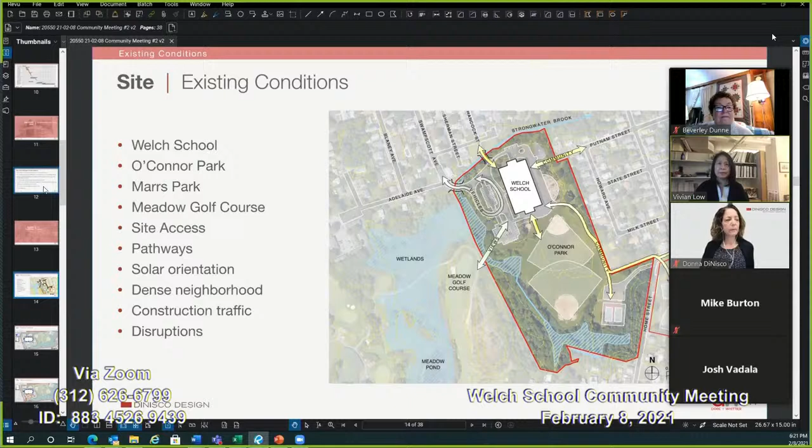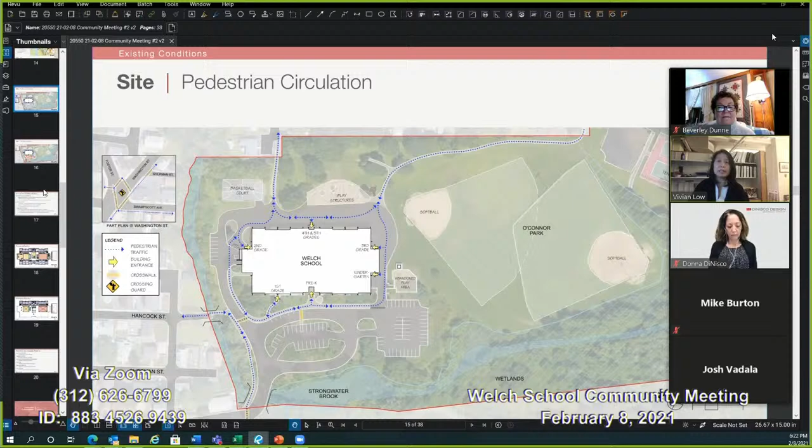Understanding how circulation works helps to inform how improvements to the building and the site are approached.

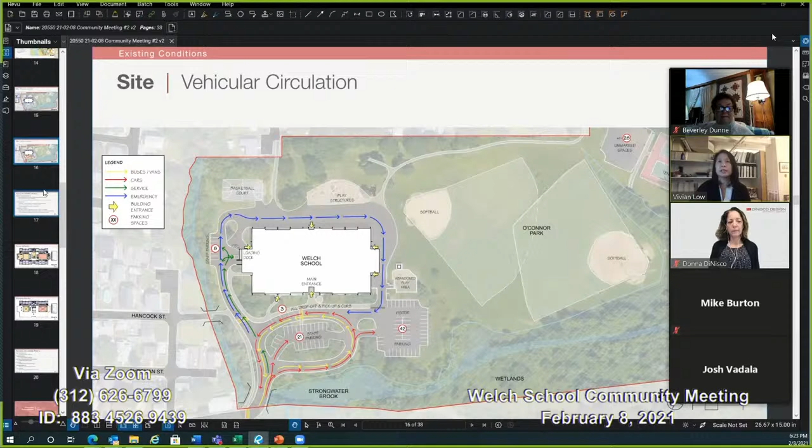So what we learn from the site is that based on the existing conditions, improvements are required for accessibility as well as for maintenance purposes. We looked at the condition of the vehicular pavement and curbing. Some are in poor condition, some are in fair condition. We're going to be looking at how to improve that.

We looked at the recreation areas. The play area in the back has tree wells that have in time kind of depressed. So we're going to look at improving that area to make it safe for kids to run around in. We also looked at the play structures as well as site lighting, and then we also looked at what the condition of existing plant material is.

The site is bordered by wetlands and riverfront, and we want to make sure that whatever we do on the site does not impact the wetlands and the waterfront or the riverfront.

What we'll be proposing is to improve a lot of these existing conditions and also to improve the site lighting, with the goal of providing a safe and accessible outdoor environment.

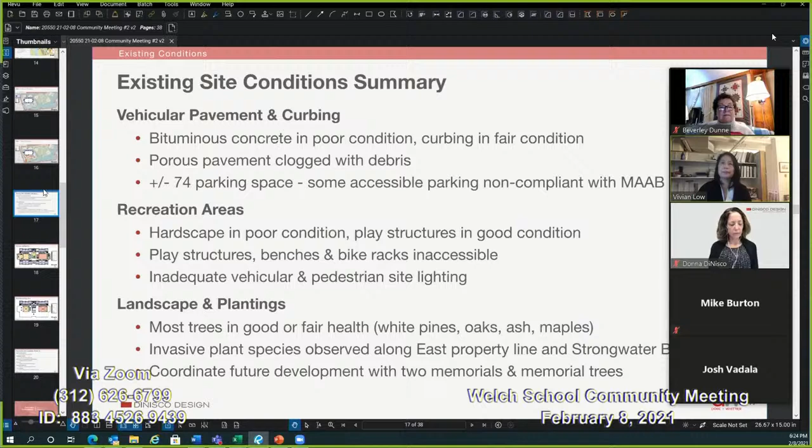The existing building conditions were also evaluated as part of the PDP phase. Again, as Mike referred to, the PDP is the first part of the feasibility study.

We did find, however, that all building systems will need to be replaced, and improvements are required to meet accessibility requirements within the school.

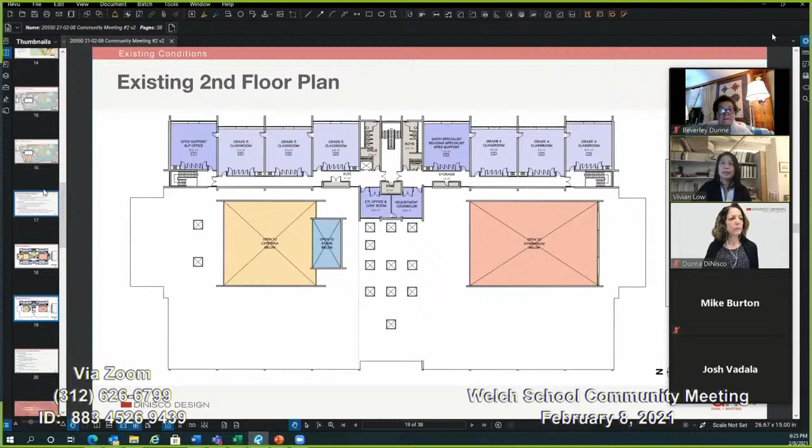The existing structure is sound, but will require reinforcement at areas of work where we will be adding equipment. Hazardous materials have been identified, and areas of code and accessibility non-compliance have been evaluated.

Based on the conclusions from the existing condition studies, we are refining the scope of work that will be included as part of the Welch Elementary School project. Again, all of the existing conditions and also the program, as Donna mentioned, is really what informs this project.

We'll be repairing and providing new pavement at the play area to the back side of the school. The area where the play structure is will have new rubberized surfacing, providing accessibility to that area for kids with disabilities. We'll also be looking to add new site lighting, and looking at ways to enhance safety and security on the site.

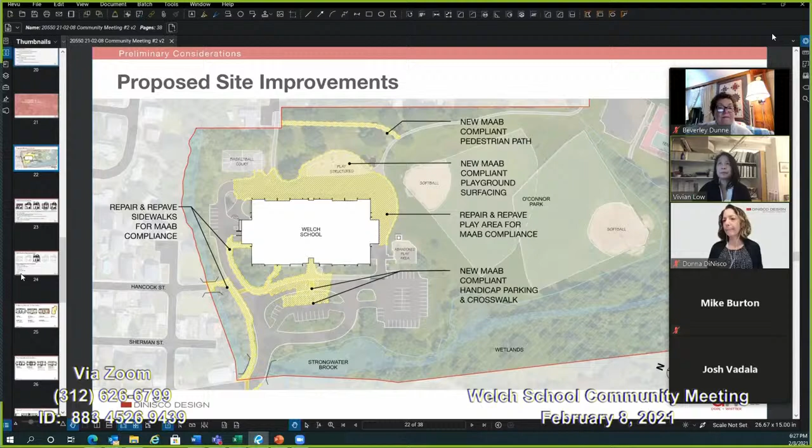While most of the systems upgrades within the building are pretty straightforward, we've looked at several options for the mechanical system that provides heating and possibly cooling at the Welch.

The existing system provides for heating only through what's called a unit ventilator, these are cabinets that sit at each window in each classroom and draw fresh air in through the window wall. It heats and mixes with some of the ambient air, heated through a heating coil from the cabinet, and then blown out again. These units are old.

Many are in need of replacing, or they'll need replacement parts, but parts are starting to become hard to come by. They're also very noisy, which really contributes negatively to the learning environment.

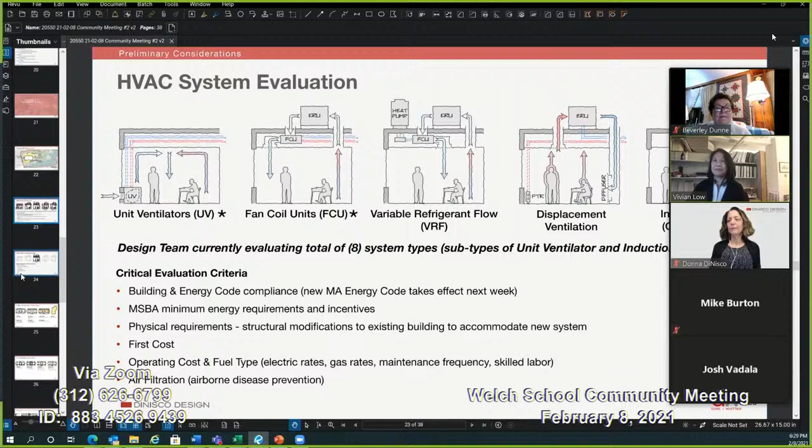So from the evaluations, the VRF system was ultimately selected as the basis of design. VRF stands for Variable Refrigerant Flow, which describes very broadly how the system works. The system provides full air conditioning for the whole building and is electrically operated, so it does not require a gas line to be brought in. It's also cost efficient in that it has a lower installation rate cost than some of the other systems, and also has efficient operating costs.

Also, the components, you'll see in this little diagram, reside in the ceiling, and they're fairly quiet, which is great for a learning environment.

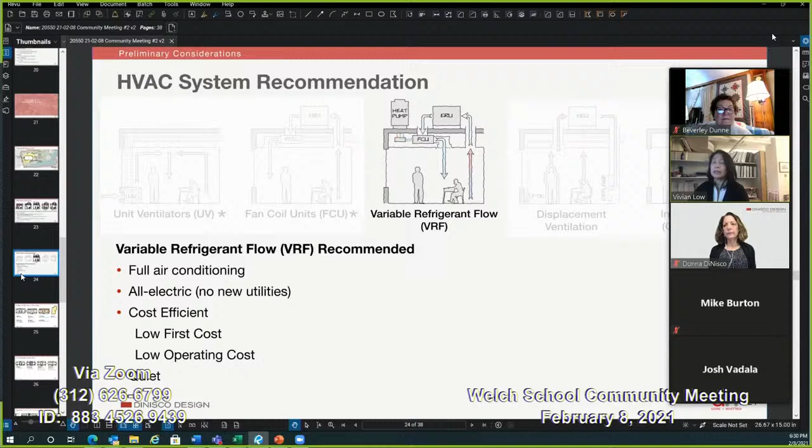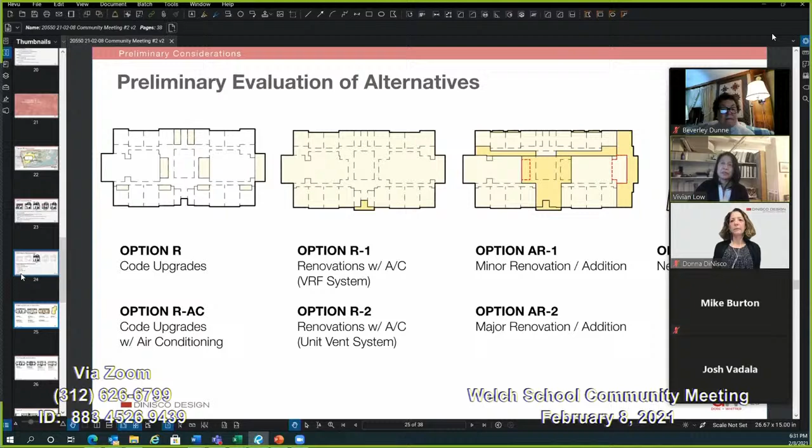Working closely with members of the building committee and school district to narrow down the options, it was determined that neither an addition renovation project or a new building would be fiscally feasible. We want to note that the Welch Elementary School project, when first submitted to the MSBA, was to be a robust repairs project, but was moved to the core program by the MSBA. This allows us to build more into the project, such as renovations for programmatic needs, whereas a repairs only would really just repair and replace building systems.

So based on the initial goals and fiscal limitations, the final evaluation of alternatives would include a repairs and code upgrade option, which is the option R on the screen here, and RAC, and a renovations option, which is the R1 and the R1 Plus. These are just 2 different approaches to the 2 basic options.

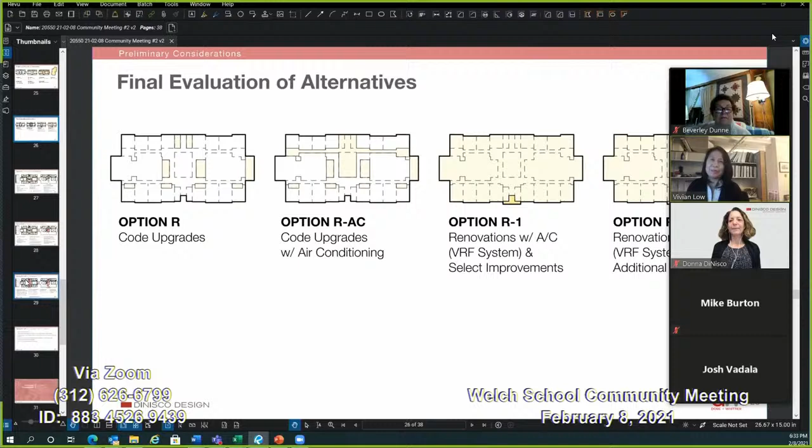Option R is just a basic swap out of the unit vent system for HVAC, whereas the option R with AC has the AC option. R1 has selected improvements, and R1 Plus has a few more than the selected improvements, and we'll get into that.

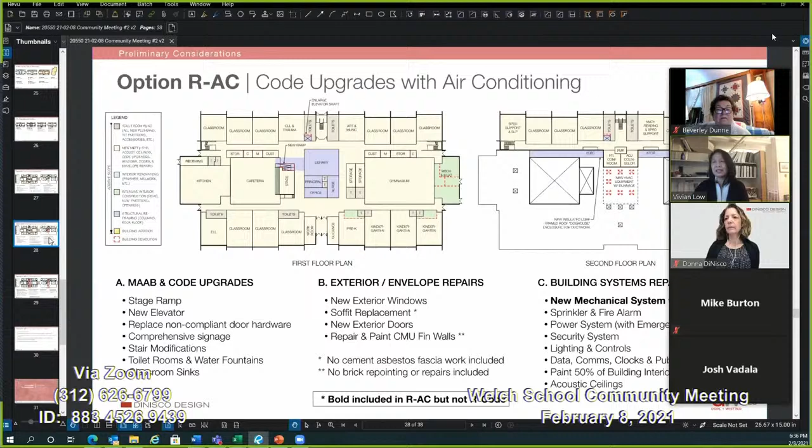All improvements are planned to be done in a phased manner, where quadrants of the building will be sectioned off and separated with barriers to ensure safety and security for all students and staff. This building design accommodates the sectioning off really well, in terms of the number of stairs located in this building and the quadrant orientation. We'd be looking at vacating eight spaces at a time, and have explored incorporating temporary modular classrooms on the site to provide the ability to vacate spaces on a phased basis. We've also been working with Dr. Vadala on this and other strategies that would make doing the phased work well, and please know that the safety and security of students and staff are first and foremost priority for us.

Most significantly, both R1 options include renovations and relocation of the admin and nurses suite and expansion of the library. You'll see this in purple, at the center of the school. This option provides the opportunity to move the admin and nurses suite to the front of the school, providing a better connection with visitors entering the school, and also frees up space in the center to allocate to the library for much needed program space.